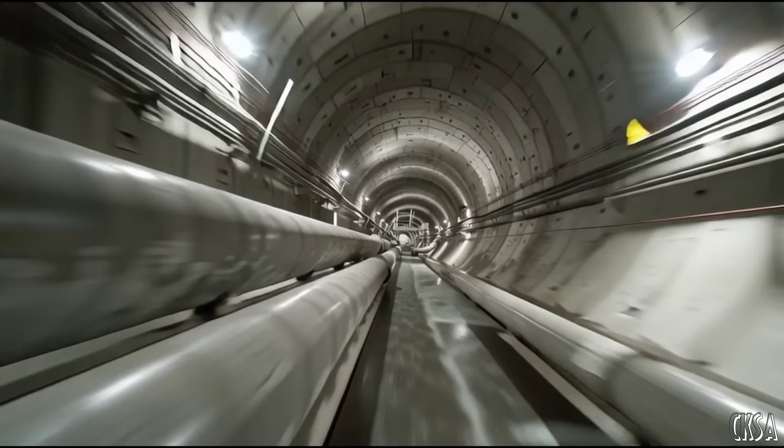But how does a city of this size receive water every single day? There is no sound of machines pushing the water, no motors working around the clock, no sense of effort. That is because New York, for the most part, does not rely on pumps to bring water into the city. The water arrives because it starts higher. It moves according to a simple principle: gravity.

But it was not always this way. And to understand why New York works today, we must return to the moment when water began to run out. In the early 19th century, New York grows too fast, faster than its streets, faster than its institutions, and faster than its water. The city depends on wells and small local sources.

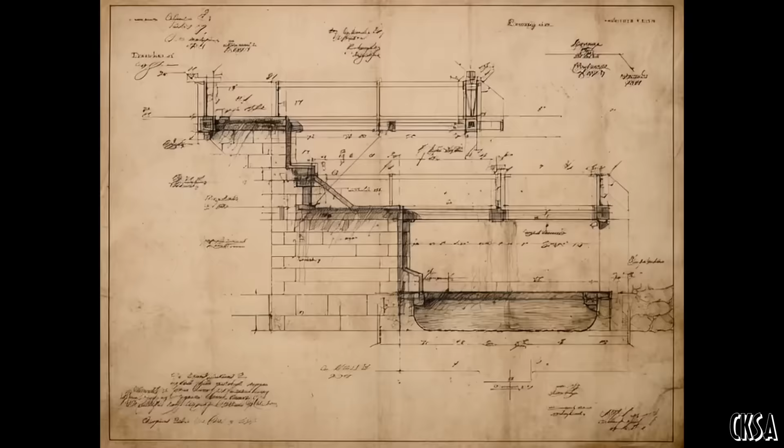As the population grows, these waters become contaminated. What once was enough is no longer safe. Disease spreads, fires become uncontrollable. Without clean, abundant water, the city reveals its fragility. The city comes to understand something essential. It cannot continue to grow by relying only on what surrounds it. The answer is given a name: the Croton Aqueduct.

The Croton Aqueduct brings water from the north, from the Croton River Valley. The water is not pushed, it flows downward, moved only by elevation. The aqueduct transforms the city. Public health improves. Fires can be fought. New York begins to trust an invisible system. But New York keeps growing, and in time even the Croton Aqueduct begins to show its limits.

The Croton Aqueduct solves an immediate problem, but New York keeps growing. And the city realizes something unsettling: the future will arrive faster than any temporary solution. The question is no longer, where can we find more water? But rather, how do we supply a future that does not yet exist? The answer requires a radical change of scale.

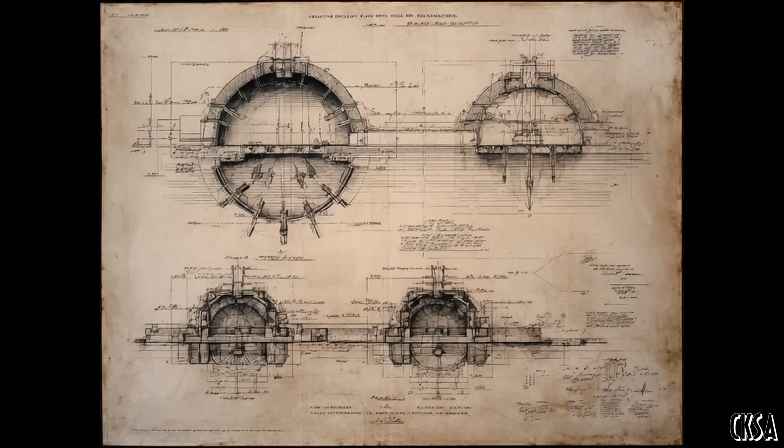Water must be sought not just outside the city, but hundreds of miles away, and not only far, but higher, much higher. Elevation is not a geographic detail, it is the key to the system. New York decides to build a system that will work before the city truly needs it. A system designed for decades, perhaps for centuries.

A new set of systems takes shape in the Catskill Mountains and in the Delaware River Basin. The wager is simple and bold. If the water starts high enough, it will arrive on its own. What emerges from this decision is not merely an aqueduct, but an invisible machine operating on a continental scale.

The system that sustains New York does not rise on the skyline. It has no towers, no smokestacks. It begins outside the city and moves invisibly. The water begins here, in reservoirs built at elevations higher than the city itself, high enough for gravity to do the work. From here, the water disappears. It enters the ground and travels through tunnels carved into solid rock. Hundreds of miles, a journey that takes days.

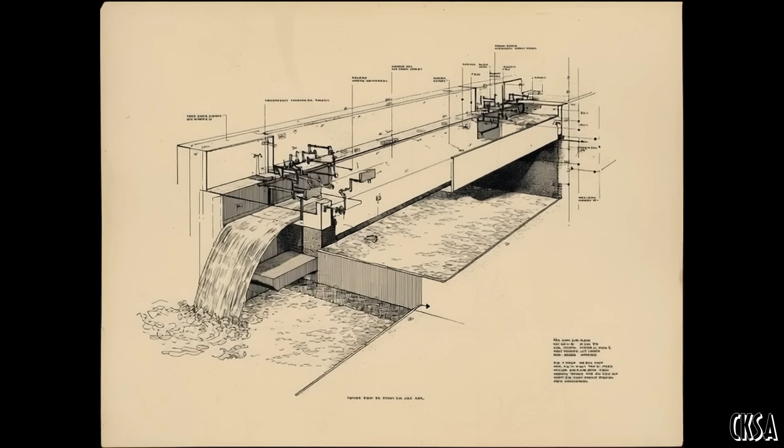No motors, no pushing. The water moves according to a single principle: difference in elevation. As long as the source remains higher than the destination, the flow continues. There are no moving parts along the way, nothing to turn on, nothing to turn off. The system does not depend on a single route. It was designed with redundancy, so the water can keep flowing even when parts must be isolated. By the time the water reaches the city, it has crossed a continent in miniature.

By trusting gravity, New York reduces its dependence on energy, reduces points of failure, reduces complexity. The system works best when it goes unnoticed. But as the city grows upward, gravity meets a new challenge. For decades, gravity was enough. But New York did not grow only outward. It grew upward. The water that reaches the city arrives under pressure, but not infinite pressure.

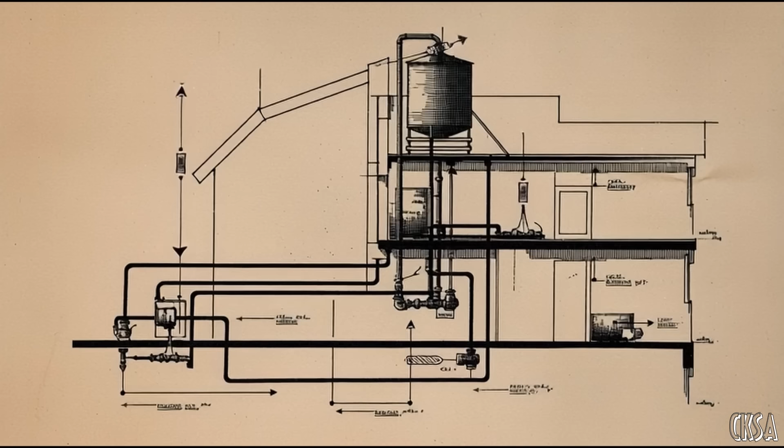In ever taller buildings, gravity needs assistance. The answer does not come from a new central system. It comes from local solutions. At the top of buildings, New York adopts a simple, visible solution: rooftop water tanks. Water is pumped only as far as the roof. From there, it flows down on its own. This solution reduces complexity, isolates failures, and allows each building to manage its own pressure.

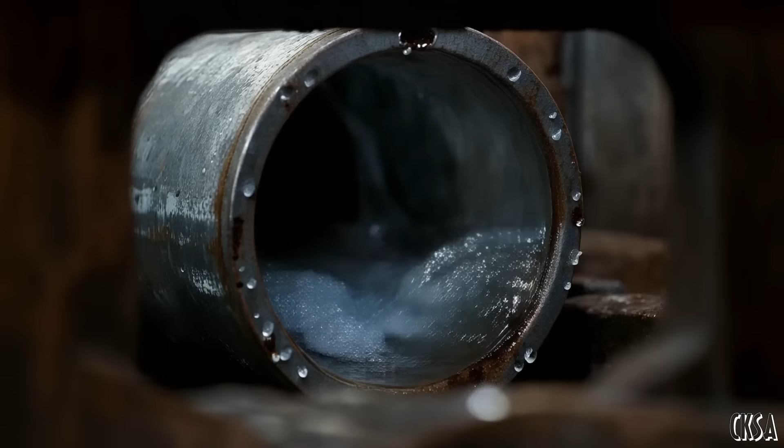Old and new buildings rely on the same principle. Technology changes, the logic remains. Rooftop water tanks may look outdated, yet they are part of one of the most reliable urban water systems in the world. When everything works, no one notices, but maintaining this balance requires constant attention. Even the simplest systems are not eternal. They keep working because someone takes care of them.

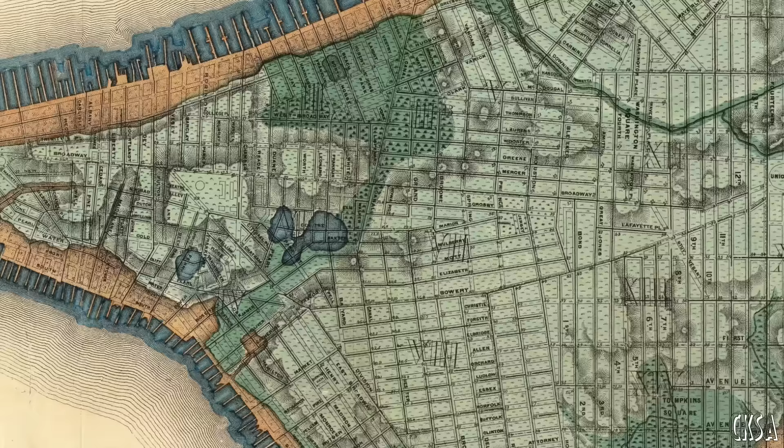Some parts of the system are more than a century old. They have crossed generations, and they remain in use. Unlike most construction projects, the water system cannot stop. Not even once. Every repair is planned for years, sometimes for decades. Not to improve what already works, but to ensure that it keeps working.

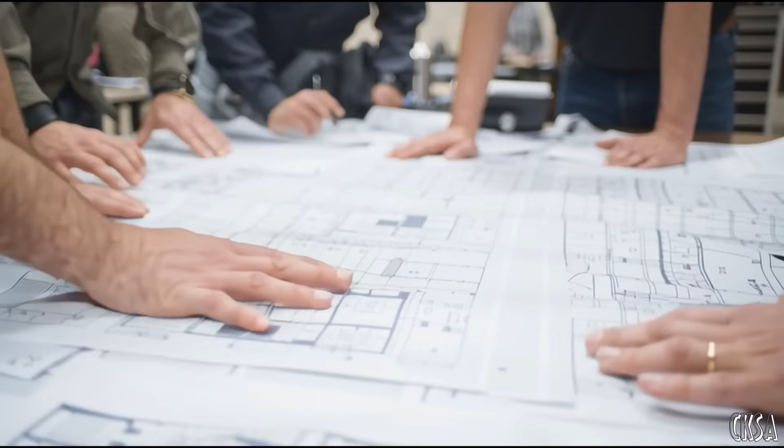When something fails, there is no warning sound, no spectacle. The greatest risk is precisely this: not noticing. Thousands of people work so that millions never have to think. The system works best when no one notices that it exists. At the beginning, it was just a gesture. Now it is an entire system.

The water does not arrive by force. It arrives by decision, by planning, by trust in simple principles. The most resilient cities are not the ones that consume the most energy, but the ones that make the best use of reality. New York's greatest technology is not electric. It is gravity, and the intelligence to trust it.